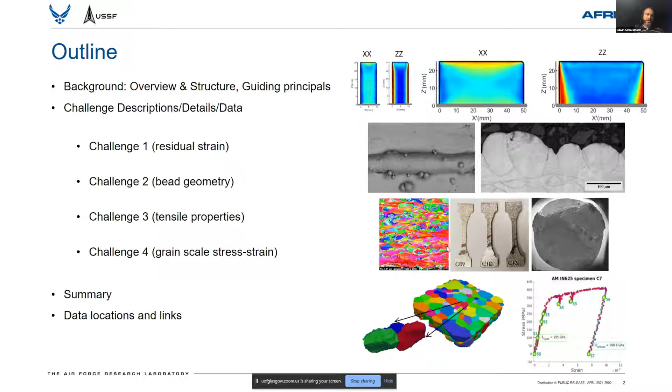So I think this won't be particularly controversial, but we view additive as a very enabling technology. The ability to rapidly iterate on designs, the ability to fabricate geometries which are traditionally very difficult, or in some cases not possible to fabricate, is very attractive in terms of a manufacturing process. But there are also some challenges which can also be viewed as opportunities, depending on how you look at it, with this collection of technologies. And most of what I'm going to focus on today is really metallic for sure, and really focused on laser powder bed. But I think some of these statements are general.

One of the big challenges / opportunities with additive is the intricate link between the geometry you're trying to fabricate, the particular details of the processing plan, and we saw a great example of that in the talk just preceding the break, and ultimately the location-specific thermal history, microstructure, and properties that are developed. This degree of coupling and interaction between these different phases of designing and manufacturing a component can present some challenges. And I would say it's a hypothesis that modeling and simulation tools will be very useful in helping to understand these links and design and fabricate successful components within the context of this situation.

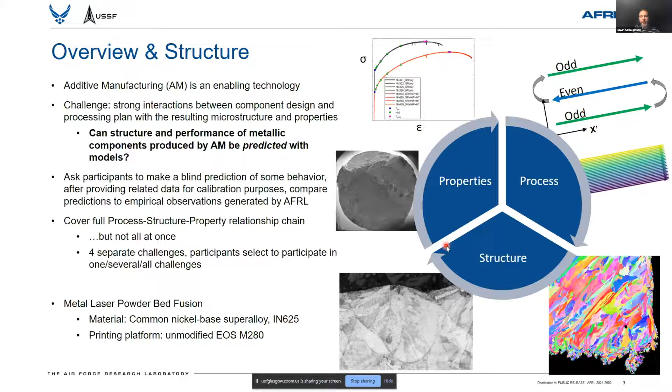And we set out to cover the full span from process to structure to properties, though not all in one leap. As you'll see here in a moment, we did break these challenges up into sub-problems that were essentially independent of each other, so folks could pick and choose the types of problems they wanted to work on. As I mentioned, this really focuses on laser powder bed fusion, and in particular with this effort, we looked at powder bed fusion of Inconel 625, a very common nickel-based superalloy, using a common machine, an EOS M280.

As I mentioned, we divided the challenge space into four specific problems along 2 orthogonal dimensions. The first of those dimensions was the length scale of the type of prediction. So we have what I call a macro type problem, which is at the part scale, multiple millimeters and above, or a micro type problem, which would be down at the scale of an individual track in, say, a laser powder bed fusion problem, or even a grain scale type simulation. So that's the horizontal axis in this matrix.

The vertical axis is the type of question we were asking, and the first row represents this link between process and structure. So given some information about the process, make some prediction about some structural detail, some microstructural aspect of the material. And then separately, provided some description of the microstructure, make a prediction about the way the material will behave, its properties. We basically broke the link between these two and asked them as separate types of questions.

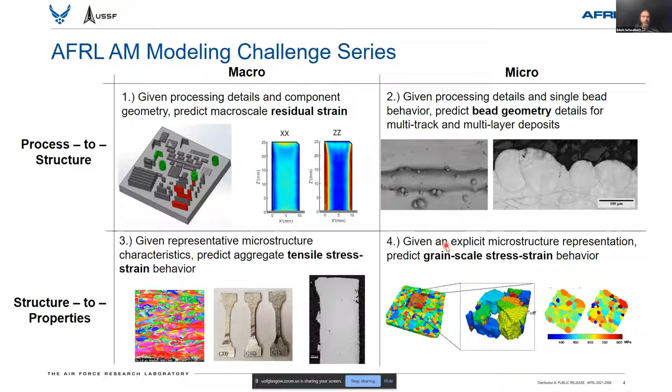Logistic-wise, we started this program a couple years ago. We really got going in terms of publicizing and publishing the problem definitions in about August of 2019. So the problem definitions, the input data, the calibration data that were provided, those were all published late 2019. Participants had through the end of January 2020 to make blind predictions about the problems that were posed.

And then we collected those responses. They were returned back to the folks running the challenge here at AFRL. And right around the time things started to shut down with COVID, March 2020, we were in the thick of evaluating those responses against the empirically observed measurements. And roughly 1 year ago, September 2020, we had a 4-day workshop debriefing the participants, speaking with folks that made predictions and talking with them about what worked and what didn't work, what kinds of data they wish they had. Again, assessing model capabilities, assessing measurement techniques.

We had about 20 different responses across these 4 challenges, and they were actually fairly evenly distributed in terms of the number per challenge question. They were also, interestingly, fairly evenly distributed across business, from large to small businesses. We had a number of universities represented, and we even had some participation from other folks at national labs.

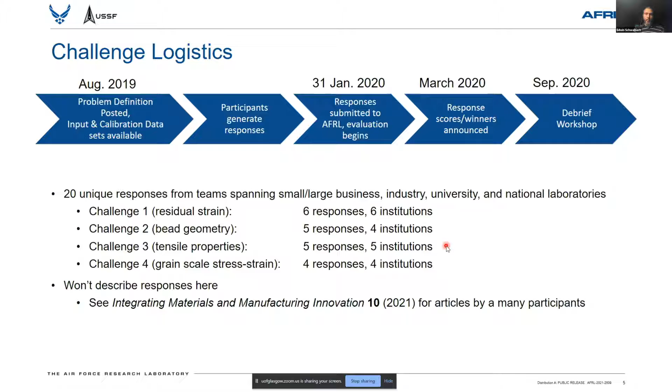This data has been published. There are a number of articles that either have already or will shortly be coming out in Integrating Materials and Manufacturing Innovation, IMMI. It's a journal published by TMS, describing the data sets as well as describing the responses that were sent back. All the respondents were invited to write an article describing what they did, how their tools work. Roughly half of them or so did end up doing that. So I'll point to some citations towards the end of the talk if folks are interested in learning a bit about those details.

But I'm going to pass through this relatively quickly, but what I will say is that there are important considerations about designing experimental and measurement activities that are intended for validation of models. And if I have time towards the end of the talk, I'll walk through some of these guidelines. There's a lot of literature on this issue, and this is a particular citation. This work by Oberkampf and Roy does a very nice job of, I think, collecting some big picture principles that one should keep in mind while designing this kind of activity.

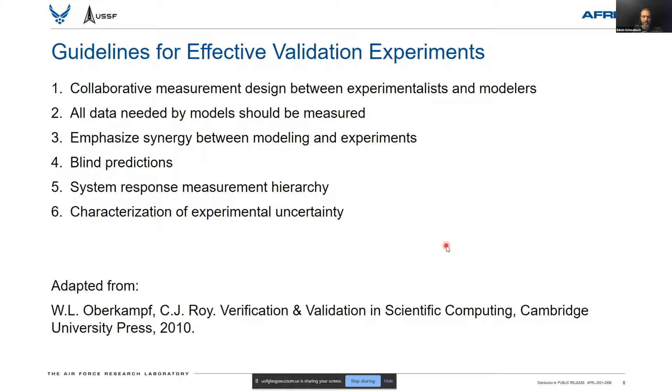I'll say we did this. We tried to follow these to the best of the constraints we had, to somewhat mixed results. I think we did better on some of these than others, and obviously nothing's ever perfect, but certainly these were very helpful things to keep in mind as we were going through this process. So at this point, I'm going to actually walk through each of these 4 challenges. Again, the goal here is to give you a high-level idea of what kind of data was generated and what is available in case folks are interested in using this kind of thing, or possibly in developing their own data sets in the future.

So the first of the 4 challenges that I'll describe is at this macro or part scale, and it focuses on the link between process and structure in the context of the prediction of a residual strain in a component. So as we build components, you can develop residual strains, and these can lead to deleterious issues like warping of the part, cracking, in some cases, delamination of parts off of build plates, ultimately build failures. This is kind of a first order problem in many builds.

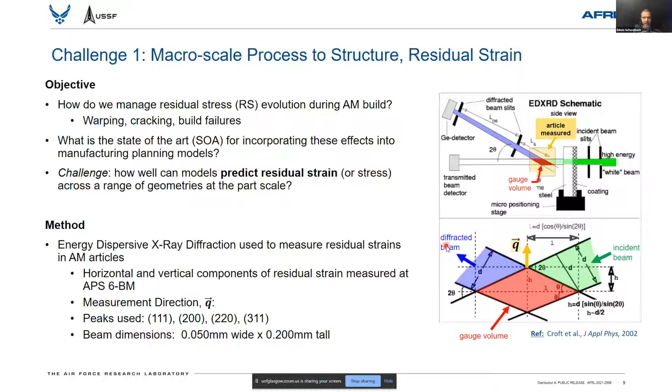And so a natural question, one of, I think, the first questions that came to mind when we sat down and started thinking about this project was, what is the state of the art in terms of the ability to quantitatively predict the strains that build up in components over time? So we ended up building a series of items and using an energy dispersive X-ray diffraction technique, along with some of our collaborators, colleagues at the Advanced Photon Source at Argonne National Lab, to measure location-specific residual strains in a collection of, I'll say, very simple and slightly more complicated components.

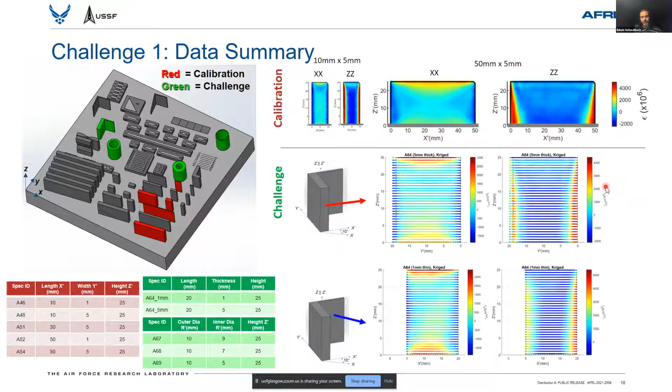So our second challenge, again staying in this process to structure regime, but now thinking at a smaller length scale, we zeroed in on prediction of bead geometry as a first order indicator of some of the details of the thermal history. Again, the preceding talk gave a nice example of how complexities in the scan strategy can cause variations in the size and shape of the melt pools. And we thought looking at the ability to predict those shapes would be a good first proxy for getting ultimately towards a prediction of more details in the thermal histories.

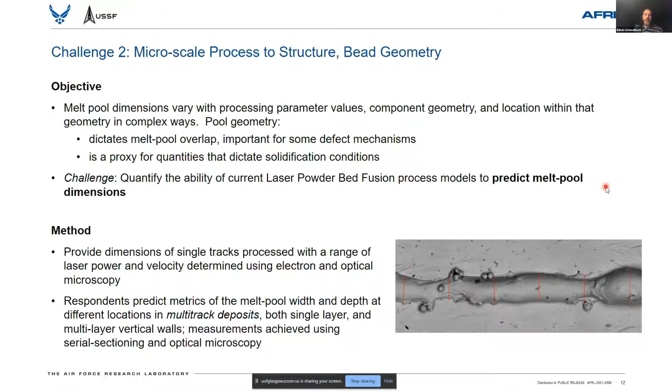So here, the calibration data consisted of measurements of individual tracks that were deposited using different powers and speeds. And then the challenge question focused on multi-track deposits. So if I switch to the next picture, you'll see a build here that actually looks fairly familiar. In the previous challenge, we were focused on some of these walls. I'm now focusing in on a pad that contains a series of single tracks, which are our calibration items. And then the multi-track items, which consist of a block that was built up as effectively a substrate, and then a series of tracks that were laid down on top of that block in a single layer in this case.

So we begin to now explore some of the transient behaviors. Again, we're still looking at a very simple scan strategy, but depending on where we section and look at this object, whether we look in the very center of this multi-track or whether we look near the corners where the beam is turning around and the thermal situation is a bit more transient, we can explore a range of different responses in terms of the material. So again, even sticking with simple geometries, you can really begin to push the system into very dynamic situations.

This is also an example where we had to be very careful about understanding our measurement technique. Particularly when we come close to these turning events, we were asking folks to make predictions about these very transient scenarios. We want to make sure that the measurement planes, for instance, are where we say they were going to be, right? If I'm asking a question about a location 100 microns from a turnaround event, I want to make sure that I'm not actually at 250 or 20. So we used some advanced serial sectioning techniques and fiducial marking strategies to get ourselves to a position where measurements are coming from the intended location to within single digit micron precision.

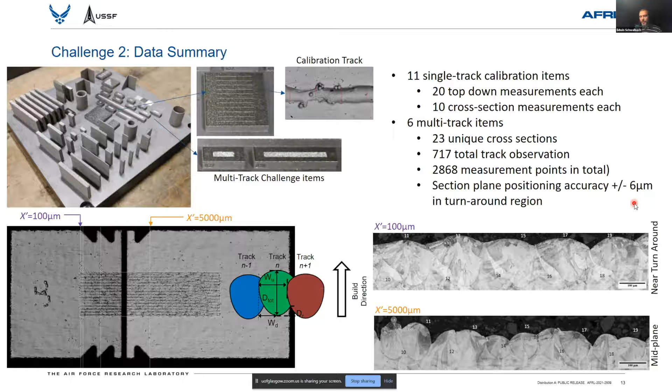So again, this kind of thing seems fairly simple, fairly trivial, but quickly can become quite complicated in terms of actually executing the experiment and understanding the uncertainty you have in your experimental data if you want to make a one-to-one comparison with the models.

Switching now to the structure to properties type questions and going back up to the macro scale, here the focus was on trying to predict tensile behavior of, I'll call them bulk type structures, given information about the microstructure. So we're not giving processing information anymore. We're not asking people to make predictions about the microstructure. We're basically, in this case, going to define, hey, this is the microstructure that we observed after printing these components. Please make a prediction of what you would anticipate the tensile behaviors to be.

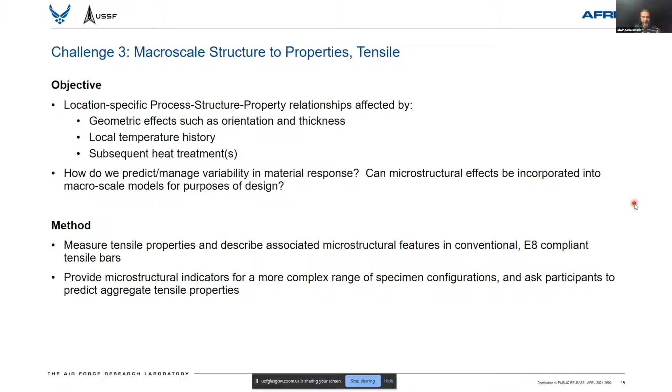So again, we've heard a few times about the effect of location specific variations in the process that can change microstructural features. Looking at things like the thickness of a component, its orientation, and then things outside of the build, like subsequent machining operations or heat treatments that can modify the microstructure. So here, the calibration data consisted of printed tensile bars. We basically provided the tensile behavior. So you see the stress strain curves for ASTM E8 compliant round machined tensile bars that came from an additive manufacturing build.

In addition to characterizing the mechanical behavior, we also characterized the microstructure, and as a kind of a quick pictorial description of that, I'm showing some electron backscatter diffraction maps of the grain structure interrogated on orthogonal planes in a region which is representative of the gauge. But we also provided a number of different quantitative descriptors of the microstructure.

This is another theme throughout this series. We typically did provide some kind of summary data, some kind of quantitative information, tabular data, in many of the scenarios I'm describing, but typically also provided the raw data in case various respondents needed some kind of input feature that we hadn't chosen to summarize out of the raw data. So that raw data was made available in case people wanted to do further analysis.

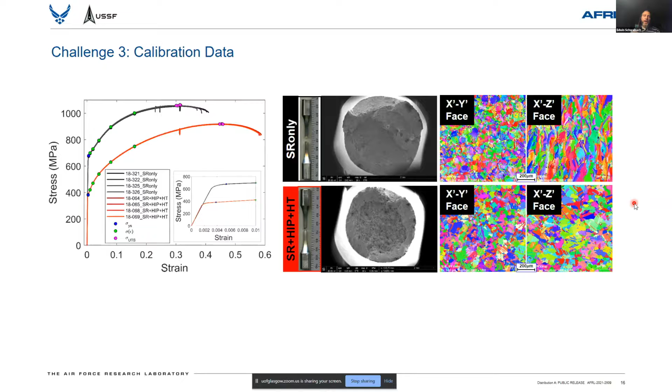So this is the calibration data, and then the actual validation operation. We provided very similar, essentially the same descriptions of the microstructure, but now we're looking at a very broad range of specimen geometries. So we are varying specimen thickness in the as printed configuration. We're varying the orientation of these objects. In some cases, we have as printed surfaces.

In other cases, we've removed both the roughness and the near surface microstructure from the specimens. And then we're also exploring a couple of different heat treatments in these materials. So again, the microstructure descriptors were provided, and the request was to predict various aspects of the stress strain behavior.

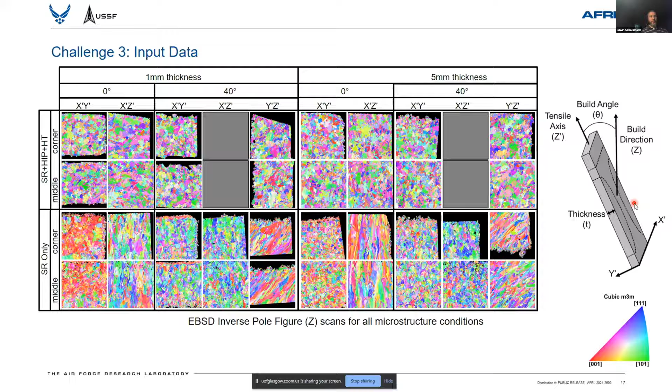Our final challenge, checking the clock here, number 4, was again sticking with structure to properties, but now moving down to very fine scales, grain scales. Here we're really looking at the response of a particular grain in the material to aggregate loading. So in this experiment, we took a tensile bar that was designed to go into a high energy diffraction microscopy setup at Argonne National Lab in the synchrotron at the APS.

This is a specimen that has a relatively small gauge volume. It's about a 0.5 millimeter by a 0.5 millimeter by roughly a millimeter in length. This can be pulled in tension, and you can see on the right here a stress strain curve with some interrupted experiments collected along the evolution of this stress strain curve for this specimen, where we performed at each of these yellow points a diffraction experiment, a near field and far field diffraction experiment

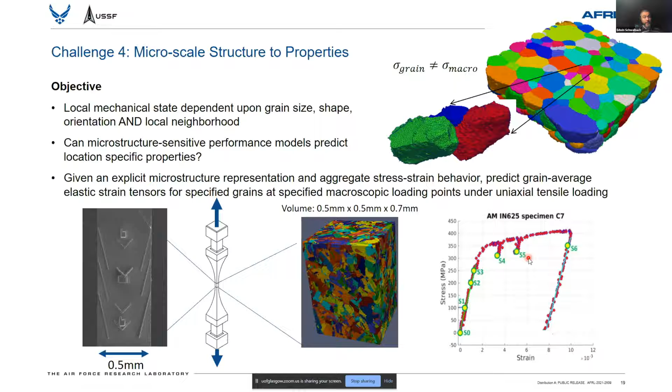that allows us to characterize the microstructure to some extent, but more importantly, the state of strain in the individual grains in this specimen. So we can see basically how the aggregate loading of the specimen is partitioned in various different grains to get at the effect of not just the details of a particular grain's description, but also its neighborhood, what grains surround it. So this experiment, the loading experiment I just described, was carried out at APS.

In the beamline, the specimen was unloaded and brought back to AFRL, where we performed a serial sectioning operation to produce a higher resolution, essentially a higher fidelity description of the microstructure. And then a fusion operation was performed in order to bring together this high resolution description of the microstructure with a grain by grain and stress state by stress state description of the evolution of the elastic strains during this tensile test.

This produced a data set that has about 27,000 grains described, considering the grains that are more than about 3 microns in diameter. Of that large collection of grains, we could clearly track 165 of them through all of the loading states, all 7 strain states. And of those grains, just under 30, 28, I think, could easily and very clearly be linked back to the higher fidelity description of the microstructure that you see on the left-hand side here. So these 28 grains formed the basis of the challenge.

The full microstructure was provided as part of the calibration data or input data. The stress strain curve for the whole specimen was provided again as the input data, and then the question was basically what is the elastic strain in any of these individual grains at the various different loading states. So the idea here is to provide some data for characterizing, for instance, crystal plasticity finite element type models of these very local evolution of mechanical properties.

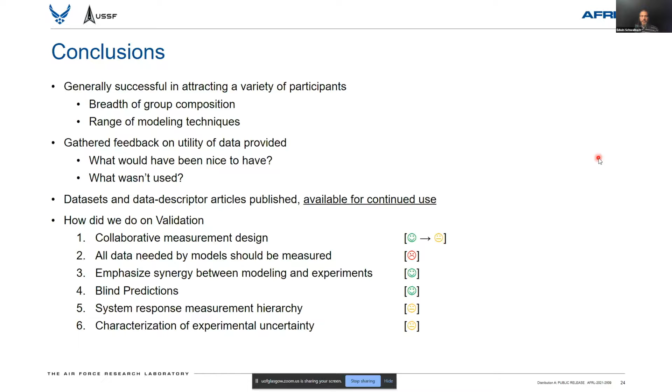So with that, I will wrap up. I'm going to put up on the screen some of the citations I mentioned. Integrating Materials and Manufacturing Innovation, starting around June this year, contains most of these publications, both in terms of the data descriptor articles that go into much more detail on the experimental techniques and the data that's available, to include links to those data sets. And I'm not showing them here, but many of the participants did choose to also submit articles describing their modeling contributions in basically the same journal edition as the papers that you see here.

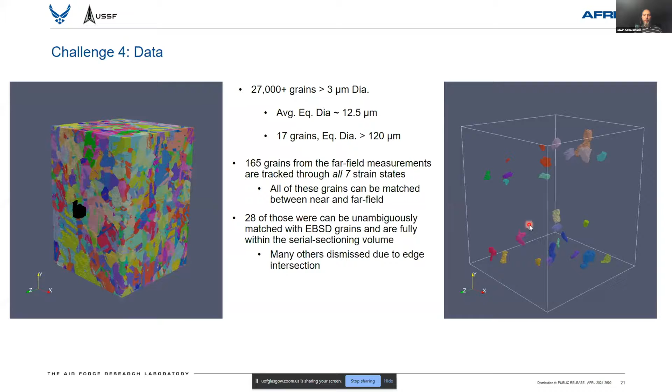Yes. So the serial sectioning operation that I mentioned, I showed primarily the reconstruction in terms of the electron backscatter diffraction description of the grain structure, but we do have optical sections throughout this domain, and those provide a picture into the voids, the various types of porosity that are present in the specimen. So those were part of the description of the microstructure.

In terms of the tensile behavior, the aggregate tensile behavior, I don't know how important they were. I would have to go back and ask some of our folks how close the challenge grains we looked at were to some of the pores in the material. Again, I agree for dynamic loading, those items I would expect would play a very significant role. For the particular tensile test, I don't know.

And that brings up another interesting kind of issue here. I mentioned kind of the neighborhood. Was one of these challenge grains near a pore or not? What was the closest pore to one of these grains that we selected? The grains that we selected were not necessarily a random sampling of all of the 27,000 grains within the domain, right? They had to meet a number of specific criteria in order to be considered kind of valid.

And it's actually an ongoing analysis right now to understand how representative of the global population of grains are those 28 that happen to meet our logistical criteria. But I will take that back to the team and ask about the porosity and how we can quantify that with respect to the challenge grains.

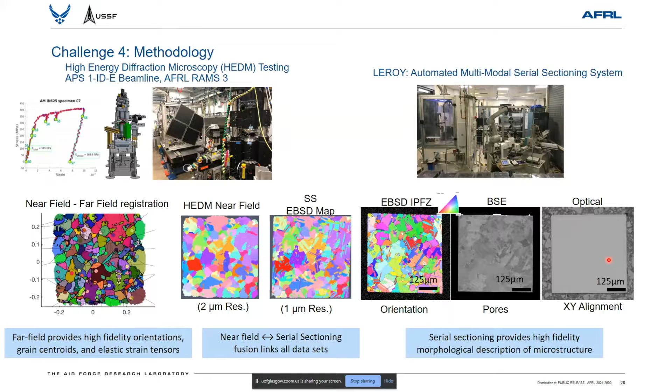I wonder, you're pointing here to 27 grains or 17 grains, I don't remember exactly, right? If you repeated the same build, you'll get different grains, right? Yes. And so, was that a set of this data used, or, I'm concerned about the repeatability, and if you cannot repeat it, you cannot model it, right?

Sure. Yeah, I think the objective here with this particular challenge was to get at some of the models that take into account the explicit representation of the microstructure, which can be important for crack initiation events, things like this that are very, very local. But how do you then take that result and coarse grain it, so to speak, to understand what that means for a population of 100 tensile bars or 100 fatigue specimens, or a component that has many, many more grains in it? That's a very, very valid question.

That was certainly outside the scope of this particular challenge, where we were really focusing on trying to understand whether the models had an accurate picture of the elastic strain in the grains. But it's absolutely essential to looking at how you use that model in the context of a hierarchy of tools that move us to larger and larger length scales, more component relevant length scales. I don't know if that quite addresses the question, but.

Well, I could continue discussing, but that's good for now. Thank you. Okay. I appreciate it. Okay. Now I'm kind of fighting with myself, but I'm very curious.

What was on average the quality of the predictions that you got? Were the models already quite good in particular challenges, or are we still far away? I would say it varies quite a bit. Obviously these 4 challenges touch on very different kinds of models, and we saw a varying degree of quality, from things that were surprisingly good to cases where there certainly still needs to be a lot of improvement. But I will caveat that with statements about the uncertainty in some of the measurements, right?